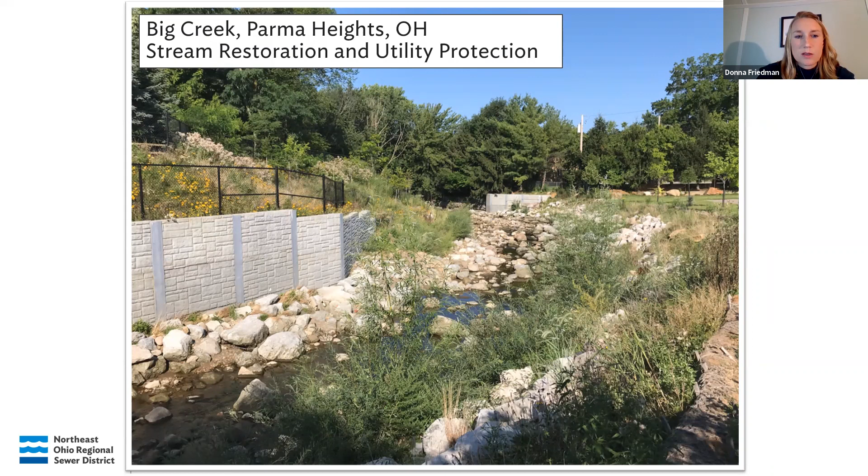Lastly, for the projects I want to show you today, this project is on Big Creek in Parma Heights, just a different section of Big Creek. This was a stream restoration and a utility protection program. There's a large sewer that runs underneath the stream. So this is the project during dry weather, and then this is the project during wet weather. You can see that the stream really fills up with water when we have those events.

So the district's very familiar with designing projects that help to handle flooding, flood mitigation and erosion, and benefit water quality. That is why we are here today to talk a little bit about this project as it relates to flooding.

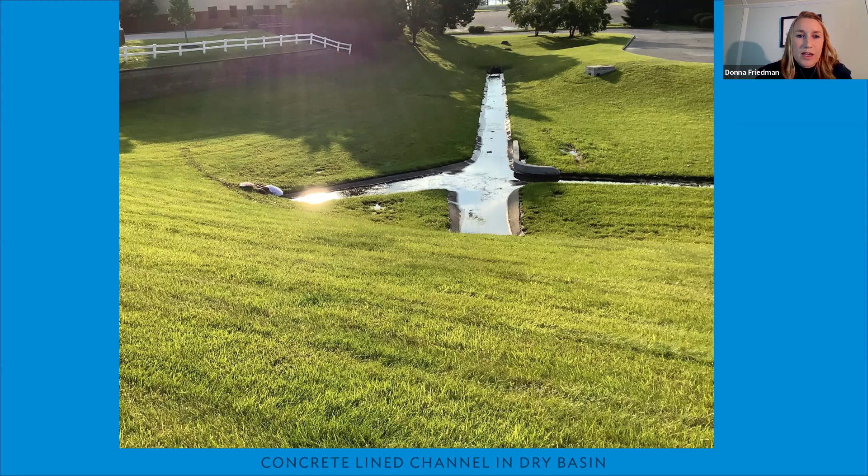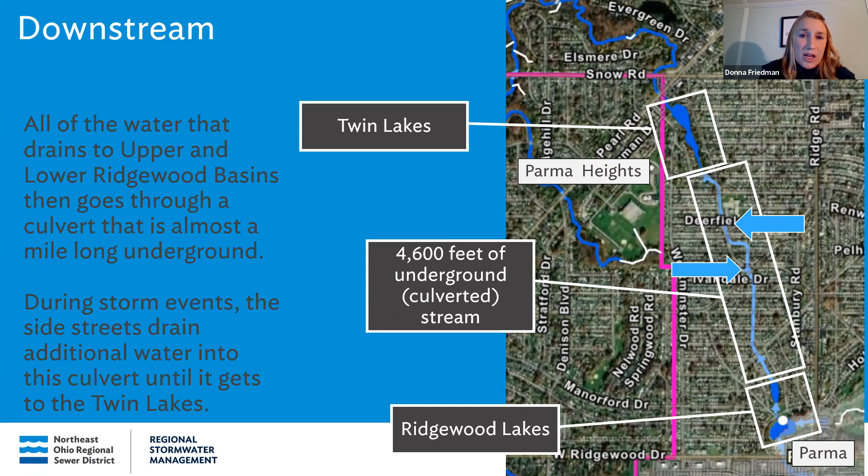We know from studies that that culvert is too small. It's not big enough, there's not enough capacity. And we also know that there's not enough storage in Big Creek to mitigate that flooding right now. And how do we know that? We know that through our master plans.

As I stated before, planning is very, very important. We don't want to spend money without knowing what we're doing first. So we've taken on several very large stormwater master plans. Big Creek falls within the Cuyahoga River North Stormwater Master Plan, and that's all of the colors that you see on this map - all of those different watersheds are represented by different colors, and they all drain to the Cuyahoga. There's also a Cuyahoga River South watershed that drains up into this Cuyahoga River North area.

So within that Cuyahoga River North Stormwater Master Plan, there were 70 problem areas identified for flooding, erosion, and water quality. Within that, there's about $544 million in construction costs.

This area we're talking about today, Upper Ridgewood Basin area, is included in problem area 7, which goes from about the Stearns Farm area to just north of Twin Lakes. Within that problem area, there's about 20 project components. So it doesn't work the way you might think, where you have one problem and one solution. That would make our lives much easier, but no, in this area there's about 20 plus project components because these are very, very complicated problems.

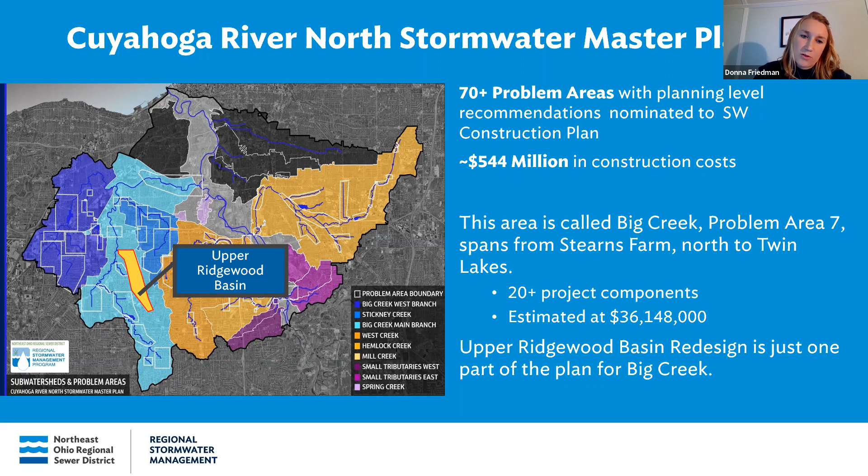And there's not just one silver bullet for them. You have to do many things in order to mitigate the issues. So those 20 plus project components cost about $36 million, and Upper Ridgewood Redesign is just one part of those components.

So I will hand it off to Derek now to talk about that project of redesigning Upper Ridgewood Basin. Thank you very much, Donna. As Donna mentioned, my name is Derek Vogel. I'm a project manager for the sewer district, and I am the project manager representative for this project.

So Donna asked me to explain a couple of project goals we want to talk about today. The first one is reducing flooding and increasing safety, so we plan to increase the safety of the area by reducing flooding once this project is done. The second goal would be to enhance ecosystem benefits and reduce maintenance costs through a forward-thinking design. Our goal is to have a community space with flood mitigation in mind.

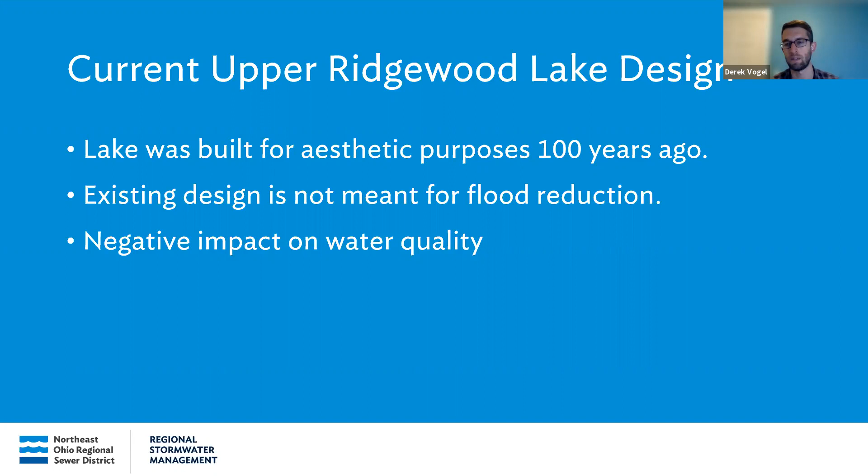So the first goal is to increase safety by reducing flooding. Let's dive into how that works. The current conditions at Upper Ridgewood Lake are that the lake was built for aesthetic purposes approximately 100 years ago. The existing design is not meant for flood reduction, and there's actually a negative impact on water quality in the existing condition.

So some of those issues, as we dig further into the existing condition, is that the outlet structure for the basin right now is not designed for stormwater management. Another issue is that excessive sediment has filled in the basin, which has resulted in an average depth of water of about 1 to 2 feet.

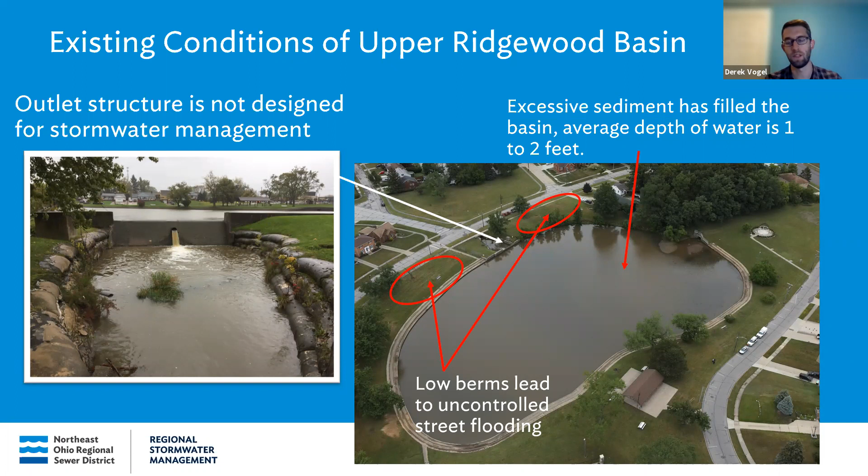That sediment that's accumulated has taken away from some of the storage capacity of the basin, which we'll talk about in a little bit. And then there's also low flood control berms on the northwest side of the basin, so during a wet weather event of a certain size, there can be uncontrolled flooding that goes over those low berms and into the neighborhoods north of West Ridgewood Lakes Drive.

So one of the big topics of basin design is active storage. What is active storage, and why can't we just remove the sediment and keep the lake in order to increase storage in the basin?

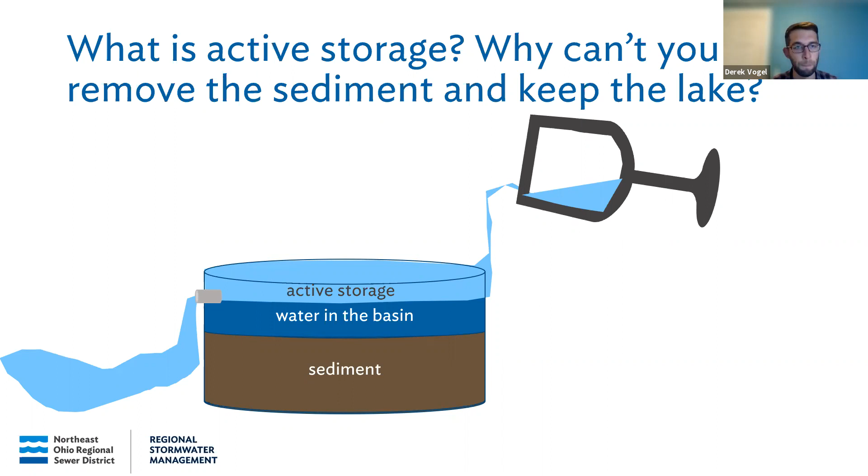If you were to only remove that sediment from the bowl and fill it back up to the water, wherever that hole is on the side of the bowl, you'd still have that same volume underneath where that hole is. So if another rain event came through and filled up the basin to the hole again, you'd still have the same amount of storage volume in there.

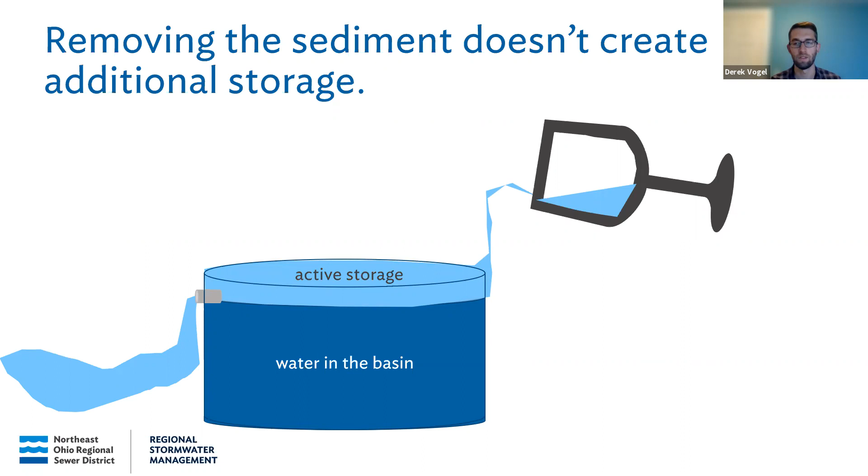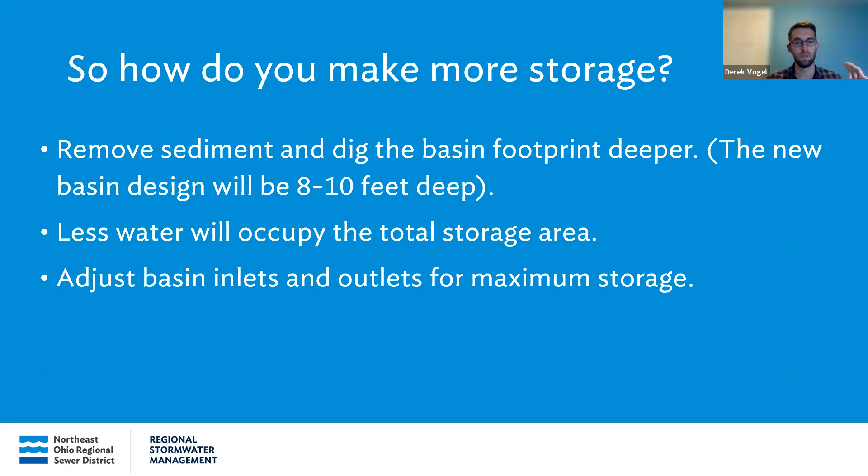So we plan to do a little bit more in order to increase the storage of the basin. We want to remove the sediment and dig the basin footprint deeper. The new basin will be approximately 8 to 10 feet deep from the top of the flood control berm all the way to the bottom. Less water will occupy the total storage area — just a little bit of water at the bottom to keep base flow flowing through. We plan to adjust the basin inlets and outlets to maximize storage. Picture the holes on the inlet and the hole on the outlet side of that bowl — that's what we're trying to adjust.

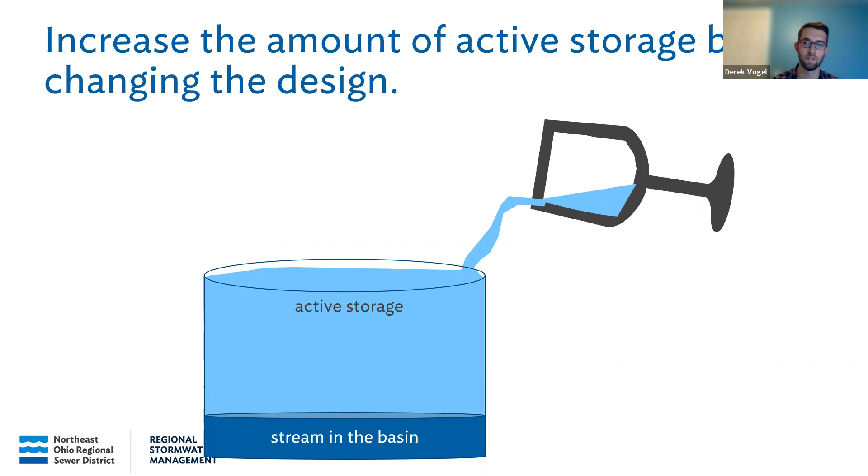So this is a representation of what we're shooting for. Imagine we've removed the sediment from the bowl, deepened the container, and now the stream in the basin is just a little bit of water that stays there all the time. When a wet weather event or storm comes through, you can see the volume of active storage has increased. In this case, we're more than doubling the amount of active storage from the existing condition to what we plan to install.

Here's another graphic, another way to think about it. If you were to cut the basin in half, like cutting a sandwich, and look at it from the side, that's a cross section of the basin. At the top is the existing basin, and at the bottom is the proposed basin. In the top, you can see existing sediment takes up some of that volume. Again, there's the passive storage — that permanent pool that stays in the current Upper Ridgewood Basin. When a storm event comes through, the active storage fills up just a little bit, so that volume isn't really helping reduce flooding downstream.

In the proposed condition, once we take that sediment out and deepen the basin again, when a wet weather event comes through, you can see that the active storage is much larger, and we're holding back a lot more water that won't make its way into the neighborhoods to the north.

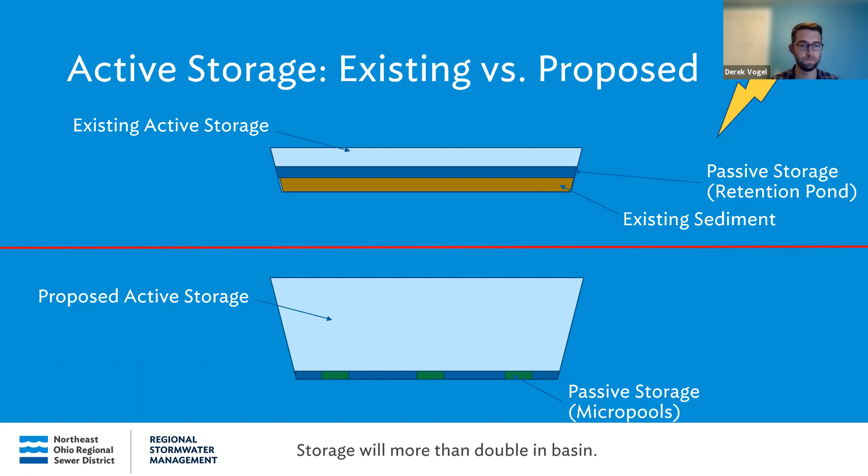So here's kind of the big reveal — this is a rendering our designer put together of what we picture the proposed basin to look like. Again, we plan to remove that sediment and deepen the basin. It's kind of hard to see from this angle, but the basin will be 8 to 10 feet deep rather than right around 5 or 6 feet deep as it is today.

The stream will flow through the basin, and we'll talk more about that in the second goal, but the flows will be controlled when the basin overtops. We plan to increase the height of those flood control berms to the north and west in order to better control how flow gets out and over the basin and down towards Lower Ridgewood Lake. The inlets and outlets will be upgraded — as we saw in those graphics earlier, we'll adjust the elevation of the inlets and outlets to maximize storage, improve conveyance as best we can, and make maintenance activities much easier for our maintenance staff.

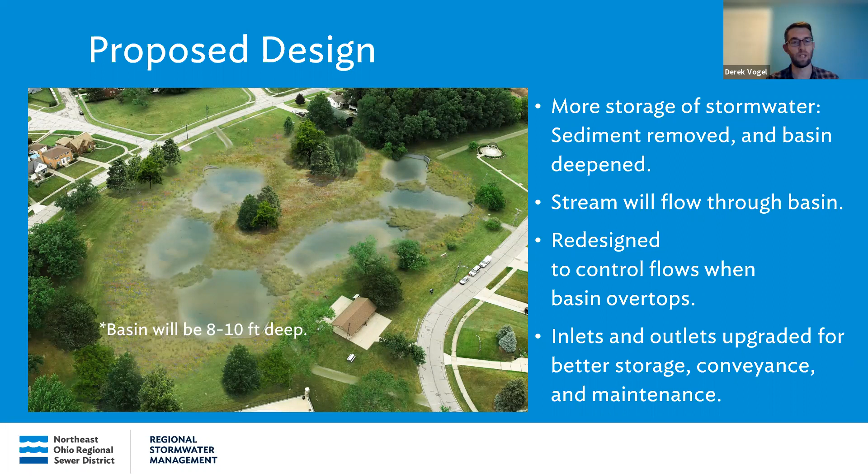So we wanted to show you a little bit of the engineering plans, and I apologize that this plan sheet is a little busy, but if you can picture Upper Ridgewood Lake from above, this is one of the plan sheets from the final design. The way we tried to design the low flow channel through here is that there are 3 inlets.

One inlet comes from the east underneath Ridge Road, coming from the golf course to the east. There's an inlet that picks up flow from the catch basins along Roycroft Drive, just to the southeast. And there's a southern inlet that comes from underneath West Ridgewood, extending to beyond where the old Parmatown Mall was. So the idea is we're creating forebays in front of each one of these inlets — a forebay is pretty much a small depressed area that fills in like a small pool, collecting debris and trash over time and keeping it in the area closer to the inlet.

That'll allow us to maintain the basin much easier by only having to remove sediment from those smaller locations near the inlets. We also plan to connect those forebays with micropools and riffles, structures that allow low flow of the stream to move around the basin in a controlled fashion before exiting the outlet structure. We have an animation showing the expected flow path from the inlets around the peninsula we plan to add, increasing the flow path before exiting the outlet structure.

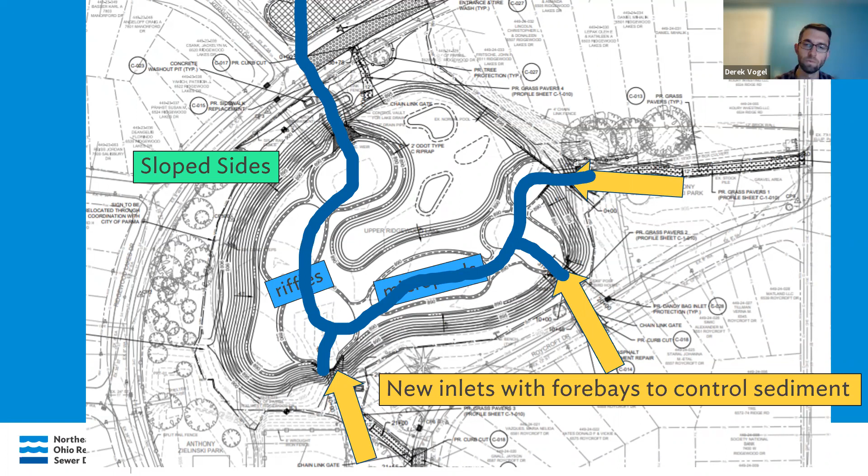One big question is, will the basin still overtop? As Donna mentioned earlier, the Upper Ridgewood Basin is pretty small compared to the drainage area upstream of it. We are increasing storage through this project, but during larger storm events the basin will still be overtopped. It will be overtopped in a much more controlled fashion, but it will still happen for storms like the 50-year, 100-year, or 25-year events, if you're familiar with that terminology.

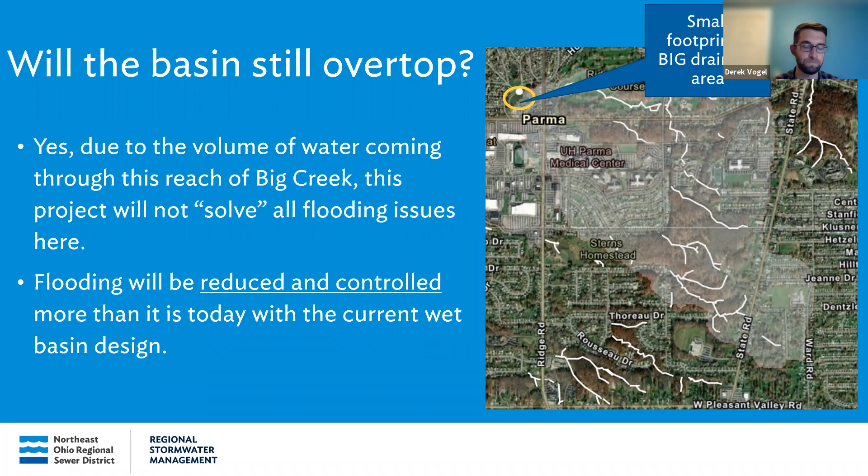So the second goal is to design with the future in mind. We plan to enhance the ecosystem on site and also enhance the maintenance activities we'll take on as part of this project.

The new basin features will include step pools that allow the stream to flow through, as discussed before. Those step pools help settle out sediment in the water, assist with maintenance activities, and enhance water quality as the water leaves the basin.

We also plan to do a lot of native species plantings—trees, taller grasses, and other species that will fortify the banks and create great habitat for native species.

We also will make sure the design is maintainable. Sediment will be managed into perpetuity, and the inlet and outlet structures can be cleaned much more easily with this maintainable design.

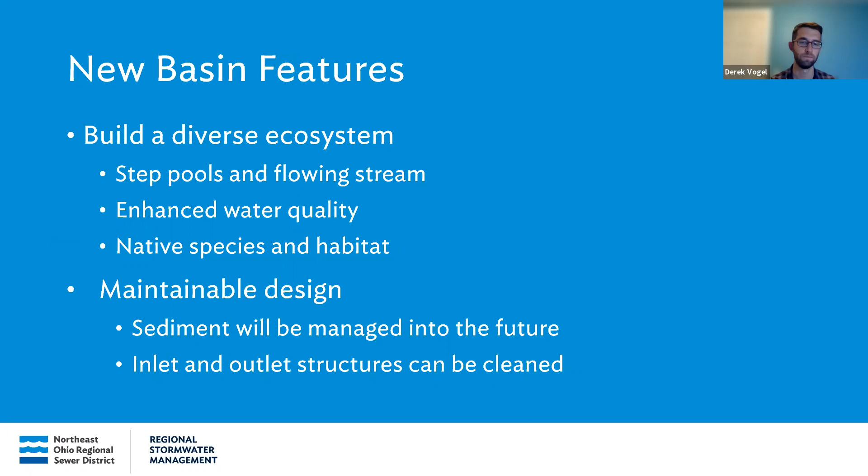So what do we expect the basin to look like? The photo on the left is from one of our green infrastructure sites. As you can see, there are a lot of native grass plantings around the basin, with a bit of wetland forming at the bottom, and it looks beautiful in the springtime.

The photo on the right is of the towpath trail, a stabilization project we also completed as part of the sewer district. You can see native riparian, or stream, plantings on the right side of the photo, and the towpath on the left, with a turf buffer in between the path and the plantings, which we'll touch on a little bit later.

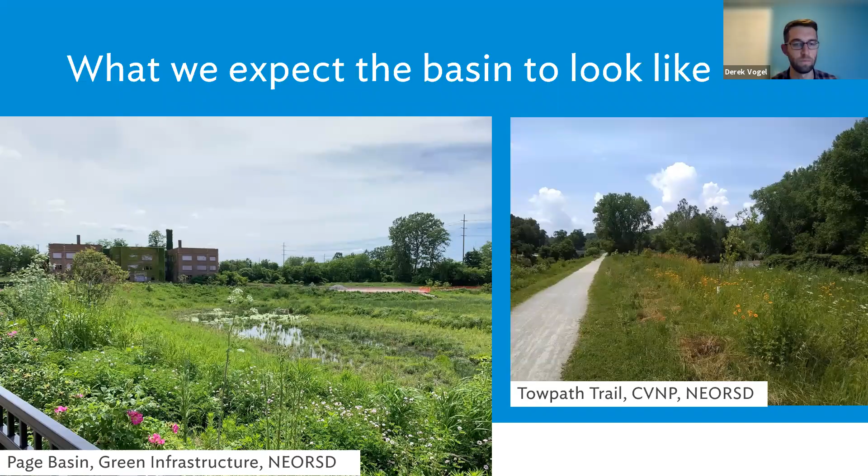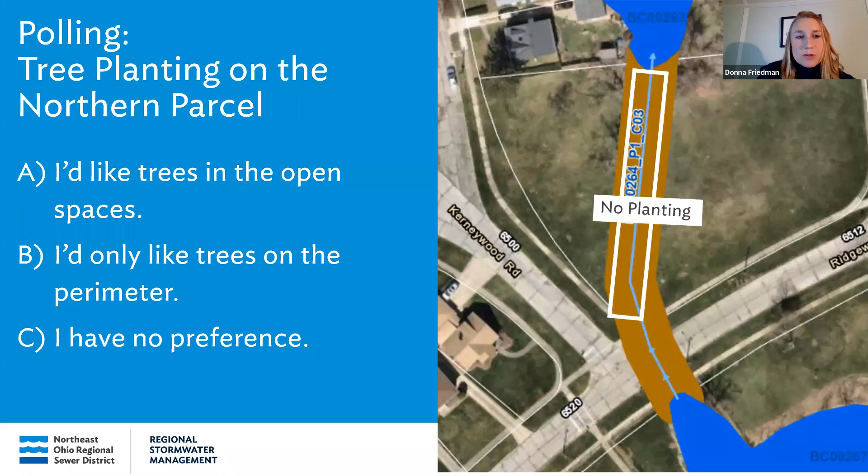All right, and then the last poll question we have today - because some folks walk around the edge where the stairs are currently on the basin, we were talking about putting in a trail from Ridgewood Lakes Drive to the splash pad. So Sue's question about putting in a trail, this is what we were thinking about. We wanted to get your input to see if that's something the community would like and would use, or if you wanted it left more naturalized. So please submit your input now.

One thing I'd like to add is that we did show a photo of the towpath trail project we had through there. We're planning to have something similar installed, with a path on the side - probably not crushed limestone, probably asphalt pavement - then a small buffer strip of turf grass, and the native plantings of the basin would be next to that buffer strip. So that'd be kind of what it looks like. Thanks, Derek.

13 people have answered, 12 want there to be a trail, and 1 has no preference. Can you repeat that? Sorry. Out of the 14 responses, 13 want there to be a trail, and 1 person has no preference. Okay, cool, great. Thanks for running those, Mike. I appreciate it, and thank you everyone for submitting your answers.

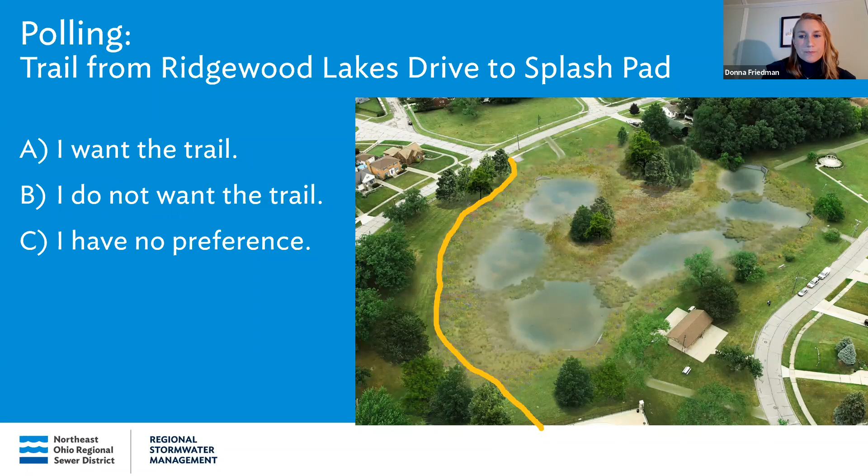Alrighty. You guys are welcome to keep submitting questions and we'll keep answering them, but I will move forward to next steps - timeline, construction, and what to expect when you have a stormwater project in your area.

So the timeline - I think I mentioned this already - we're thinking end of 2021, early 2022 the district will wrap up the design on this project. We are around 90% right now, and we will finish permitting. Construction, we're hoping will start in spring of 2022.

Here is a nice little list of all the things that construction entails. It is definitely not fully inclusive, but hopefully it gives you an idea of all the work that has to be done in order to do this project. And then early 2023 is when we expect the project to be completed.

So that includes plantings - you have to plant things at specific seasons during specific times, and that's why that date feels a little bit pushed out. We expect a lot of the major earthwork will happen within the first few months of the project. So those are the dates we have for you today, and we will send out another letter prior to construction beginning, hopefully with a more specific timeline for you all who live around the basin and the lake.

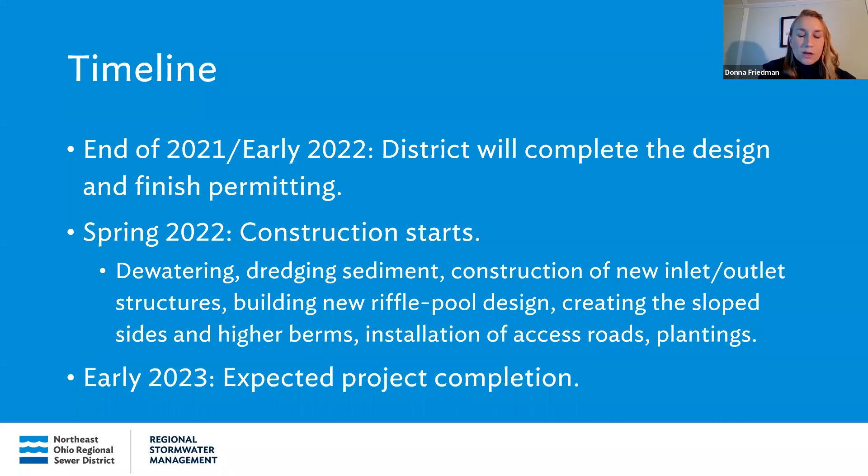Okay, so what to expect? The rest of the park will remain open. So the gazebo, the pavilions, the splash pad, all of those will remain open during construction of this project. We will not be working on Sundays.

Sediment removal: this lake was dredged once previously, but I think it was about 30 years ago, so there is quite a bit of sediment. Sediment removal can smell, there's a lot of debris that gets into the lake, like leaves, which start to break down. So removing that sediment and dewatering the lake can be a bit of a smelly process, we'll be honest with you.

So we will try to get that done quickly so it isn't too much of a hassle on you residents. The other note is that construction can be loud during the day. We realize folks work from home, so please let us know, give us a call if you feel like the noise is getting excessive. You all have my number or my email, so feel free to reach out.

I will go back to the question bar at this time. Then I can answer that first one there from Stephen.

Actually, yeah, I probably was unclear about that. In the low flow, or base flow, condition, the level of the water won't change, because you're right, the outlet for lower Ridgewood will stay the same elevation. But during storm events, because we're lowering that water level at upper Ridgewood, we're actually going to be able to store more water both at lower and upper Ridgewood. So sorry, that was just for storm events, not necessarily for the low flow, regular flow conditions.

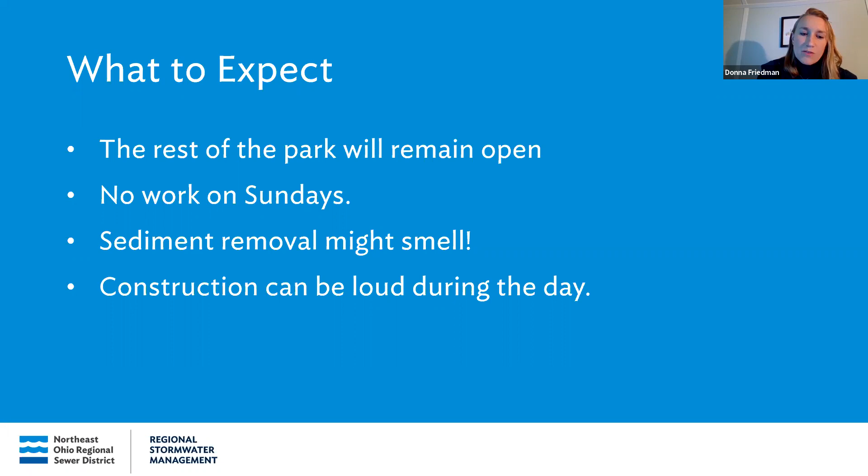The homestead program is a 40% rate reduction on your sanitary sewer bill and your stormwater bill. It's for customers 65 years and older.

Let me just check this question. Oh, thank you. You're very welcome, Steve.

It's for customers 65 years and older, or customers who are permanently disabled who are under 65. And eligibility is based on income. It's $34,500 or lower.

Our affordability program is more targeted at those who fall within certain poverty level. So it is also a 40% rate reduction, and the household income limits for 2021 are 200% of the federal poverty level, but starting in 2022, it's 250% of the federal poverty level.

So if you're under 65 and you previously went to apply because you thought you were really close and you ended up falling just shy of being within that 200%, this bump to 250 might qualify you. So it's really important that if you think you might be close, please call in. The number is at the bottom here in the bottom right to see if you would now qualify for this savings.